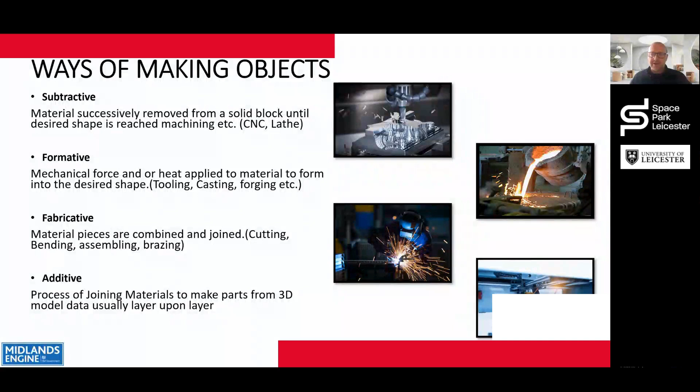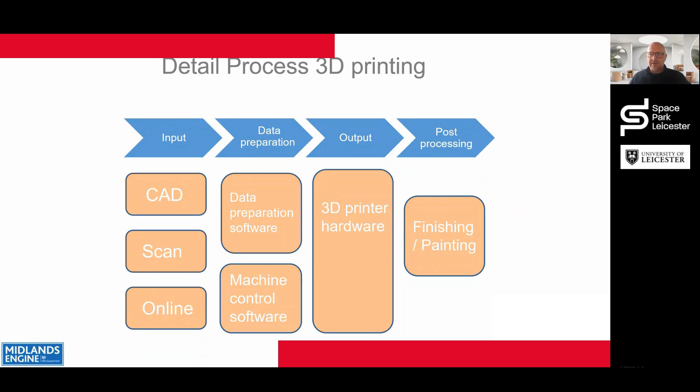So let's say you decide to use 3D printing as the process. This will start with a CAD file. You can see here on the left side of the screen, CAD, scan online - they're all ways of obtaining files. We talked about the 3D scanner that Space Park Leicester obtained, that was to reverse engineer. There are additional details on this slide, which we'll go into further during the workshops, but let's keep things simple for today.

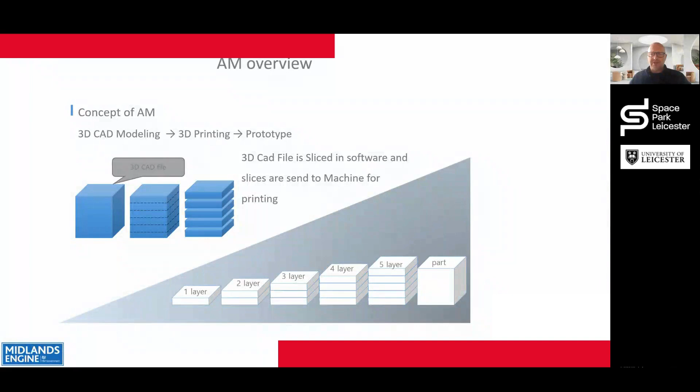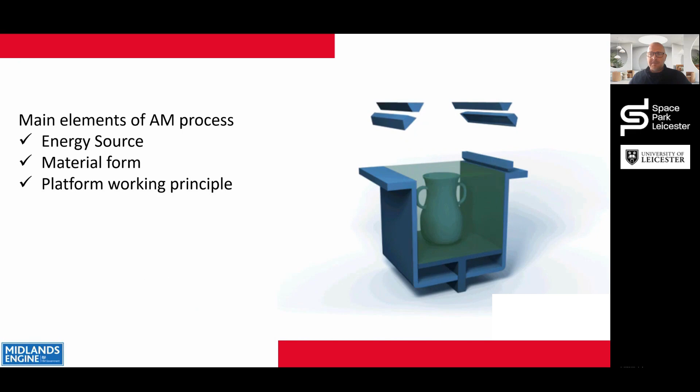Essentially, we need a 3D CAD file - imagine designing a cube, for example, in a 3D CAD software. What happens in 3D printing is these are sliced. This cube is sliced into little layer cakes, and by placing each layer upon the other, you can form the finished cube. This slice file goes to a 3D printer, and the printer will put down a layer at a time till the part is completed.

There are many different types of 3D printing technology, which we'll cover in the workshops in greater detail. However, fundamentally, each technology has an energy source, a material to form with, and a platform to lay the material onto. This is generally the requirement of any 3D printer.

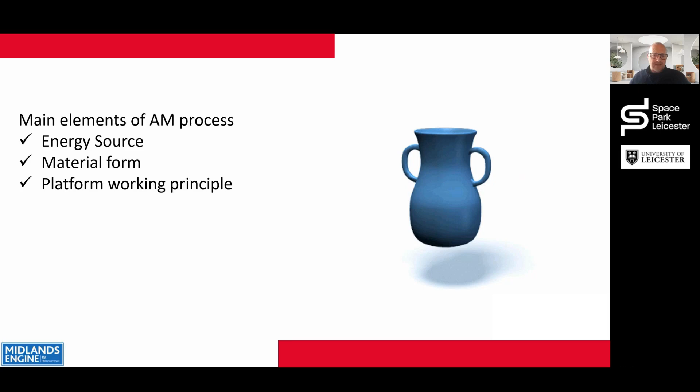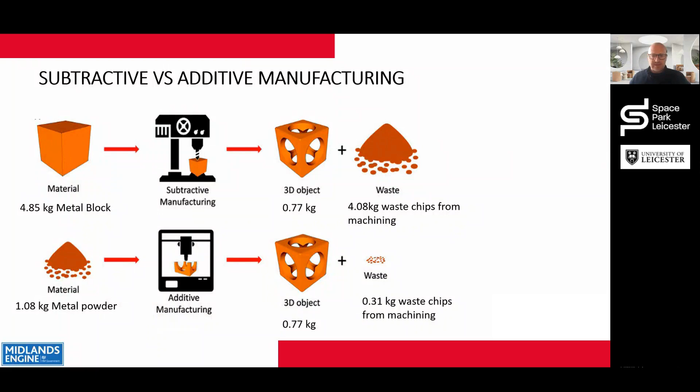We'll explore the benefits of AM technology in greater detail over the two-day workshops. Some of these benefits range from shorter lead time, to production flexibility, to reduced inventory.

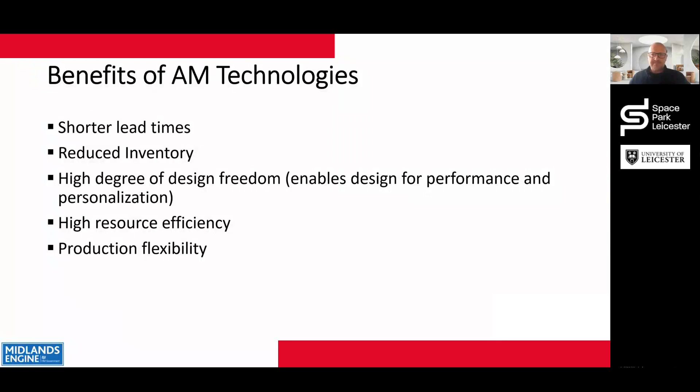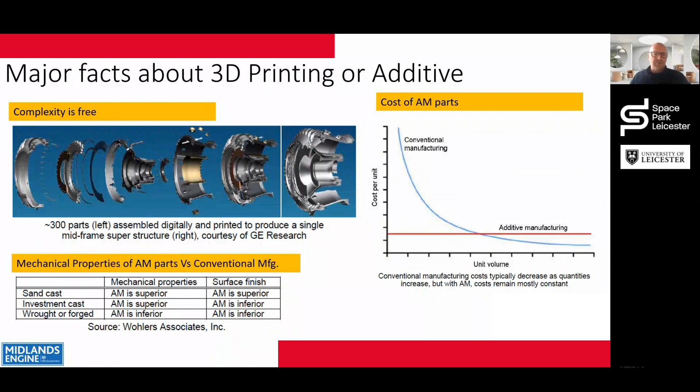Traditional versus AM evaluation of mechanical properties is key. We'll of course consider different types of AM technology available, from FFF - lots of initials and acronyms - to vat polymerization, to powder bed fusion. We'll look at all the advantages and the techniques behind these processes.

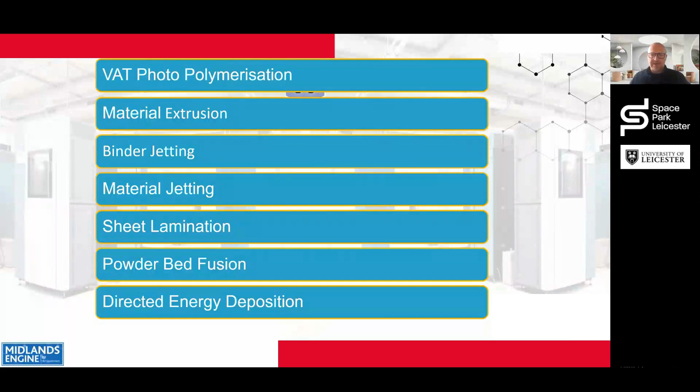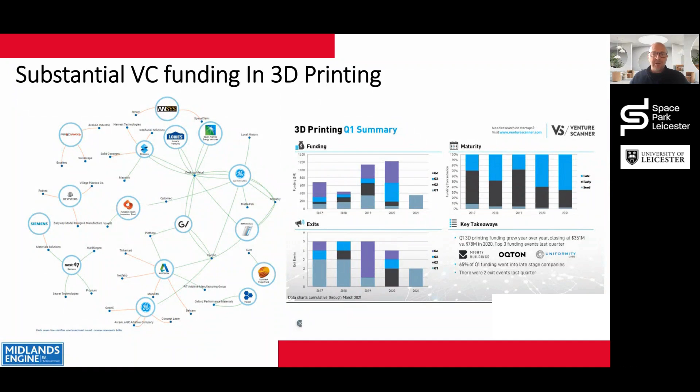We'll look at the global market of 3D printing, the areas of growth and opportunity, and this will help us form an opinion of 3D printing - is it just hype, or is it really an opportunity, a technology that helps you gain a competitive advantage?

This has been a very short 15-20 minute snapshot of what is a really large, bigger area of investigation, and we'll delve into these as part of the workshops.